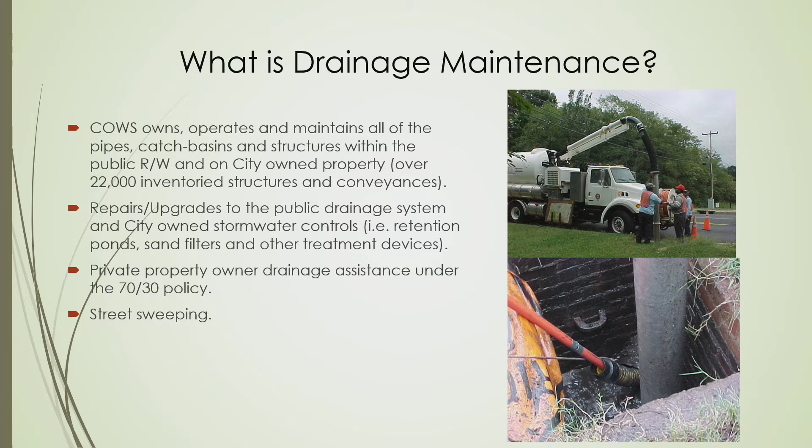Other programs that we have are our 70/30 private property drainage assistance policy, and then street sweeping that's taken care of by our sanitation department.

In recent years, we've seen a lot of uptick in these high intensity storms that has caused flooding and erosion across our community. These drainage systems, installed decades ago in the 40s, 50s, and 60s, have now exceeded their hydraulic lifetime. You're seeing things like large holes in our streets, caved-in shoulders, and thoroughfares that are not passable because the drainage systems underneath them have deteriorated to the point where they're collapsing.

At this point we have over 30 major repair projects across the city, and new projects are added regularly. As a matter of fact, since I did this presentation, we have new projects. So it's constantly evolving, constantly changing.

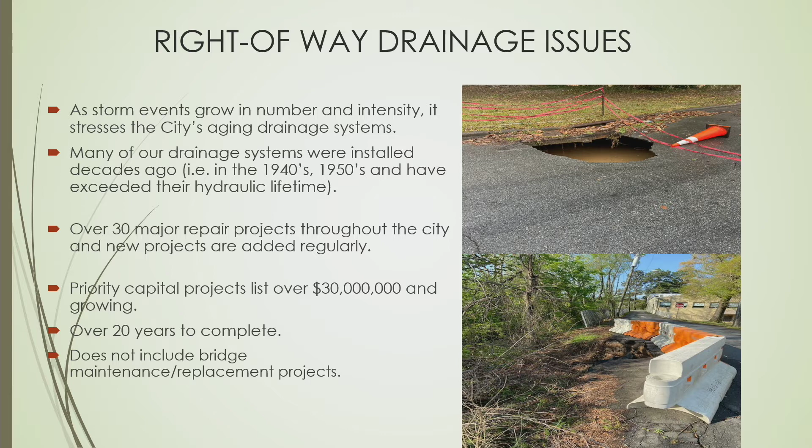That capital projects list is now eclipsing $30 million and growing, with a 20-year time span for completion. To note, this does not include bridges—this is pipes, culverts, and infrastructure pieces of a drainage nature.

Staff respond to, on average, over 500 calls per year, and they can vary from the occasional blocked catch basin that you send a vac truck out to deal with in a couple minutes, to a multi-block drainage failure—so they cross the spectrum. Our smaller repairs are taken care of by our in-house crews, but for these larger projects, we need help from contracted engineers and construction companies.

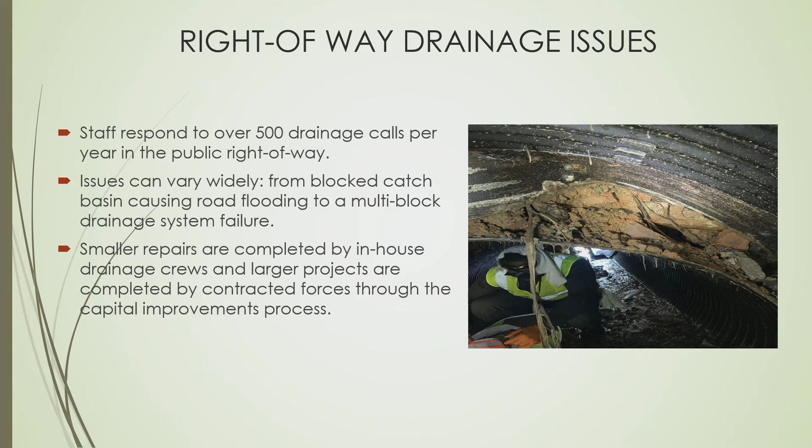So a little bit about the capital project time frame. A lot of our citizens like a quick turnaround on these projects and think the city should be able to move quickly, so I want to give some perspective here on the capital project timeline.

This all starts with selecting a consultant, an engineer, to help us out with design. That RFQ, or request for qualification statements, could last from 3 to 6 months to get to a point where you've selected a consultant. After that, you're negotiating scope and fee with that selected consultant, then proceeding toward project execution or contract execution.

At that juncture we've got a consultant on board, then we move forward with design, permitting, and land acquisition. Depending on the size and complexity of the project, that could take 6 to 12 months. Then you move to construction bidding once you've got the design, permitting, and bid documents in place—another 3 months there.

And then it culminates in construction, which could last anywhere from 3 to 12 months depending on the size of the project. So all this totals to a fairly large amount of time from the citizen's perspective as it goes from paper to actually having boots on the ground doing the work—just to add some perspective on what these capital projects take to get into the ground.

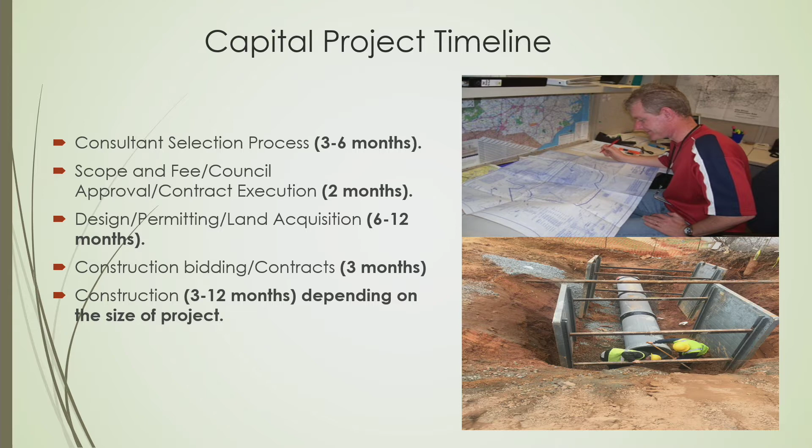Moving on to some of our higher priority drainage projects. The first one is Hawthorne Road, located in the southwest ward, probably about 150 feet south of the intersection of Hawthorne and First Street, Sinsenberger, that area.

This is the old Hawthorne culvert from before the highway was put in place, a 20 by 20 box culvert that is now settling. In the photos, the top picture shows the southwest corner, where the culvert, as it shifts and moves, is creating a sinkhole in the sidewalk. Just below it is the water line encased in ductile iron, and you can see how that infrastructure is pinching as the culvert moves.

So obviously we have to replace it. Estimated replacement cost is $3 million. As far as progress, we have an emergency contract in place with an engineering firm, and we are going through alternatives analysis on how to replace this culvert while keeping at least one travel lane of the road open because of its proximity to Baptist Hospital. But at the end of the day, the full culvert will be replaced.

Councilmember: Am I seeing that lower picture correctly? Is the pipe separating? Yes, ma'am, you are seeing that correctly. That is a water line where the bell and spigot of that ductile pipe has basically started to pinch. That's a piece of infrastructure we'll need to address when we replace the culvert. Unfortunately, this area is riddled with infrastructure, so it's far from a straight line - a very challenging project here.

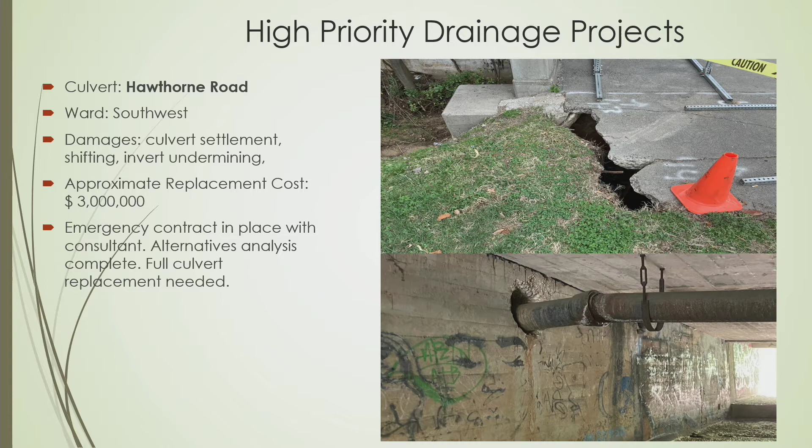Next, moving forward, this is Devonshire Road, off of Thomasville Road in the southeast ward. Here you have an aged 48-inch corrugated metal pipe where the bottom's rusted out - you'll see this theme repeatedly as we go forward. Metal pipes, as they age, corrode and rust out, so this is a full replacement of that 48-inch system. Estimated replacement cost is $350,000.

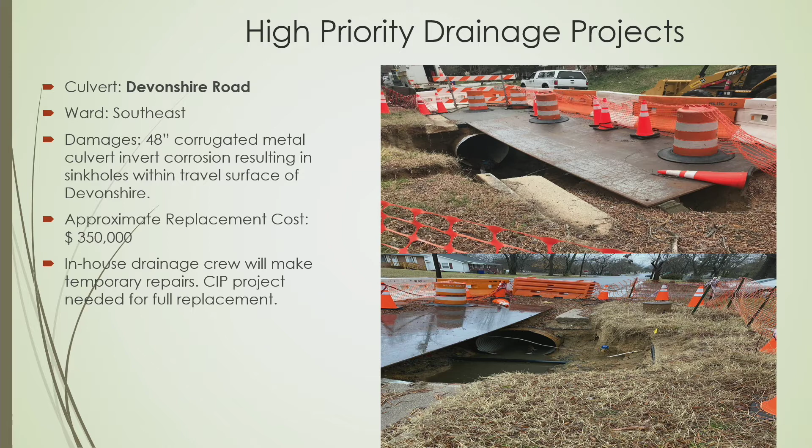Right now we've had in-house crews make a temporary repair to get the road open, and this will ultimately be designed and then bid out with a contracted external force.

Next is Lynnhaven Road, in the West Ward. Again, a corrugated metal pipe, failed system where the invert's rusted out. This is about 470 feet of metal pipe in the middle of the road, and it crosses all the water lines and sewer lines in the neighborhood. We've CCTV'd the pipe, determined the need for full replacement, and this will be designed and replaced by external forces as well.

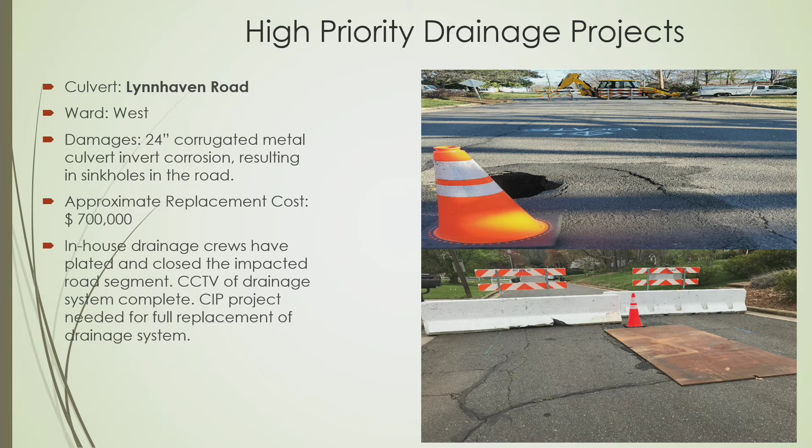Autumn Mist is in the Hillcrest Town Center development in the southwest ward. This is a damaged concrete pipe and a junction box that has basically resulted in a sinkhole in the road. Smaller project here.

We've CCTV'd this line and had our drainage forces out here as of late. We've discovered the issue, replaced a segment of pipe, and repaired the box, and we are currently backfilling this. So this is one I'm happy to say we'll be able to handle with in-house forces, and will probably need no exterior help from consultants or contractors.

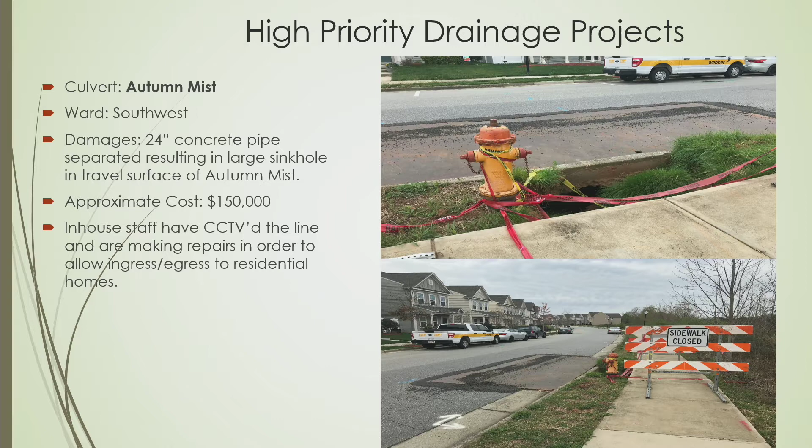Maplewood, basically another metal pipe in the southwest ward, off of Knollwood Street. This is two 54-inch metal pipes that corroded, caved in, and need full replacement. Approximate replacement cost is $700,000. We have an emergency contract in place with Louder, have delivered them a design, and have a contract with Louder to mobilize once they get all the materials in place, expected in June. So hopefully we'll get this open to traffic late summer, early fall of this year.

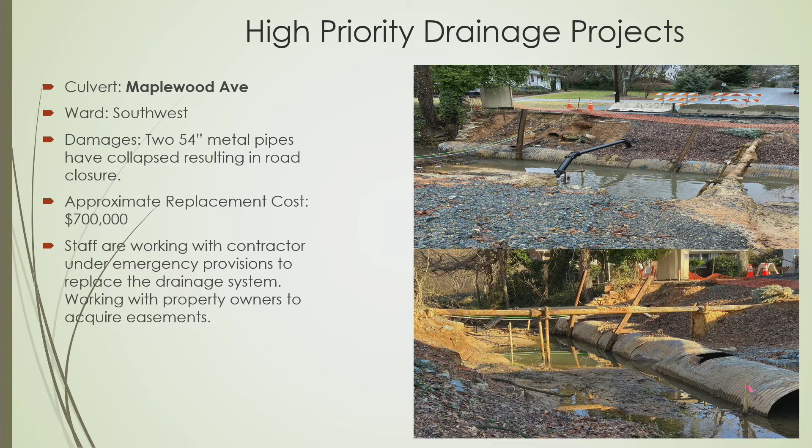Aubry Court, Northwest Ward, off of Yadkinville. This is a road that separates two impoundments where the 24-inch pipe system had decayed, failed, and took the head wall with it. The work here is to replace the pipes and the head wall. Estimated cost is $300,000, and in-house crews are working to replace the pipe and we're going to try to do the head wall work as well.

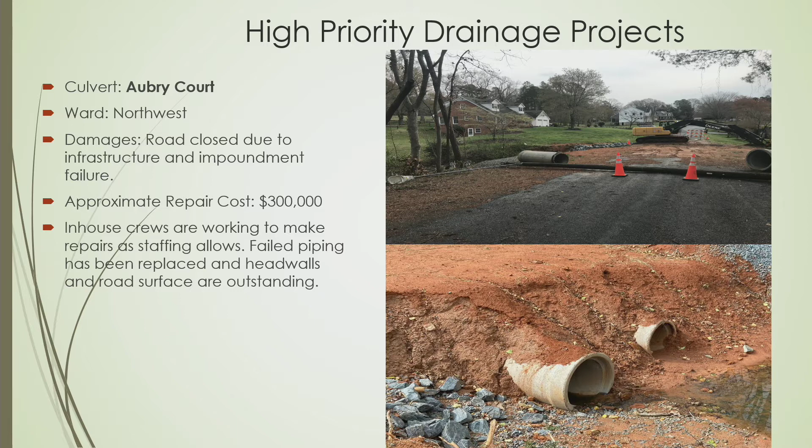Patterson Avenue, this has been on the books for a while, Northeast Ward. This is a failure of a 72-inch corrugated metal pipe. We are under emergency contract for that. Estimated repair cost is $1.5 million, and we have a contractor on board.

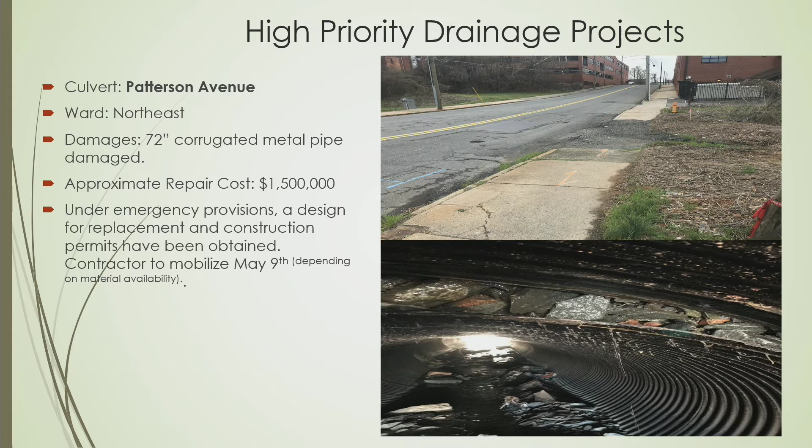This is one where material, or lack thereof, is costing us time. Our supplier cannot get the steel to create the reinforced concrete culverts we need to put in the road. So we're in a hurry-up-and-wait mode, waiting for the steel to create the pipe so we can put it in the ground. It's a situation numerous contractors and we, the city, are feeling with material shortages.

Why does that one cost so much more money? Councilmember, Scipio, this one is very deep and very complex.

This one is just up from the Beatty Center, and it has a lot of infrastructure rolling over the top of it. It's got fiber, gas, every utility you can think of overriding this metal culvert. It's also a 6-foot pipe, a very large diameter pipe, large trench, and it's got to have new head walls, the concrete on the upstream and downstream side.

You say it's up from... it's just north of the Beatty Center area. So it's going towards Liberty Street? It's at the intersection of Patterson and Northwest. Oh, so it's down, okay. Yeah, north, as far as directional. Apologize for that. Thank you.

So Underwood, north area, again a large-scale concrete box culvert. It's failing, but this one is actually not a full replacement. This is a retrofit where we're working with a structural engineer to pour a new invert in the bottom of the culvert and repair the walls instead of totally replacing it. That's why you see the reduced cost on this one at $500,000. We have a contract with a consultant to do this work and are proceeding through design as we speak.

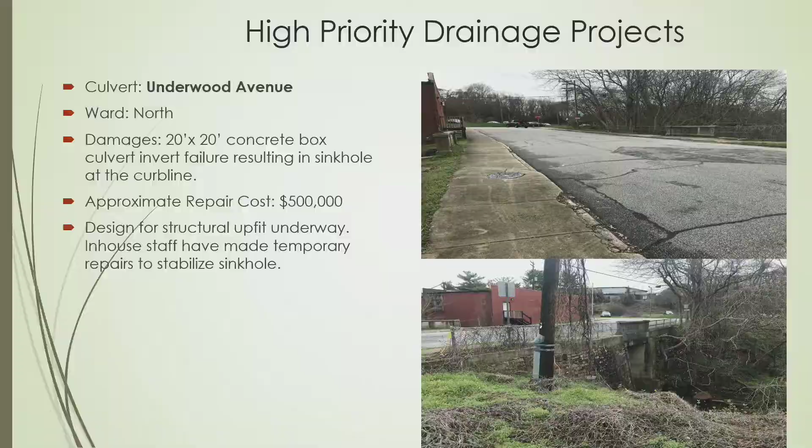I know I quickly went through those in the interest of time, but happy to entertain any questions. Mr. Huff, thank you for your typical good work and very illustrative presentation. Do we have questions? Yes, Councilmember Scipio.

I always love these information sessions because it gives me insight into what really goes on in the city that we don't always think about. Public Works Committee, keeping it real. It's really wonderful.

I have several questions. First, how large is your staff that does all of these in-house repairs? It used to be a whole lot larger. Councilmember Scipio, right now we have one in-house drainage crew that consists of a foreman, a heavy equipment operator, 3 mediums, and 3 lights. It used to be 3 in-house drainage crews, but due to staff attrition, we're running with only 1 drainage crew right now.

Are the 2 crews that we don't have in our current budget to be filled? Oh yeah, they're just vacant positions that we're trying to fill and trying to encourage anybody to come work with us.

The other question is, this may sound crazy, but do we know where all of our pipes are and the materials they're made from, or do we discover it when something fails? We know where 22,000 of them are, but that's not all of them right now. We're constantly adding inventory. When we accept a new street over for city maintenance, we're adding those pipes and pieces of infrastructure into our inventory. But that's only within the public right-of-way. Anything on the private side, we don't know the answers to those questions because we don't own, operate, and maintain it.

So yes, this is an information item, a continuation of the committee's updates on the Weaver fire. This happens to be an environmental perspective. There will be a lot of overview for this group on this one as well, based on your exposure to the Weaver fire. But on this one, we're going to focus on the impacts to air quality, the impacts to water quality, and then from an environmental standpoint, give the committee a briefing on what's going on currently with the satellite facility on Brownsboro Road, and then the parent site at Cherry Street.

So just a little brief overview or repeat of the timeline. Our first call came Monday evening, January 31st, in the 6:45, 7 o'clock range, reporting of the fire. Then as we progressed to 9 p.m., we started talking about evacuation of the 6,500 residents in the area of the Weaver site. That following morning, an 8-member EPA emergency response team came to Winston-Salem and immediately started setting up air and water monitoring locations to start collecting data. The local, state, and county regulatory groups started meeting to coordinate with EPA, share resources, and start getting boots on the ground to the stream sites and air quality monitoring sites, as fire suppression activities continued through February 2nd. And the Forsyth County Office of Environmental Assistance and Protection sent out daily media releases on air, exercising precautionary measures, et cetera, as we went through those initial days after the fire started.

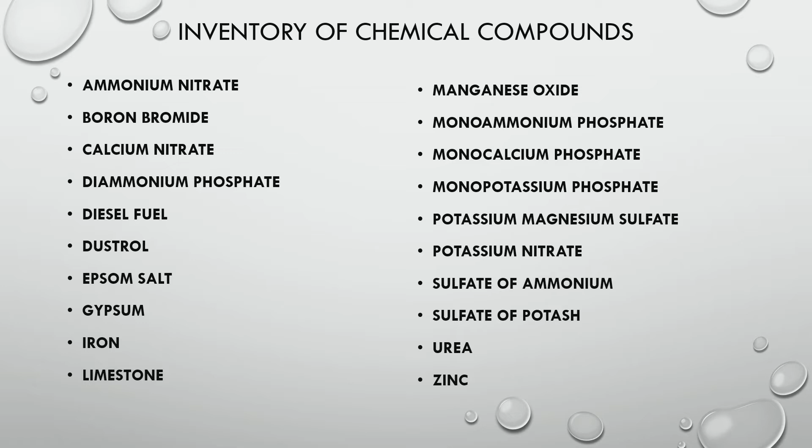So just a quick recap of that. As we all know, the Weaver site had a healthy list of fertilizers -- large quantities of fertilizers and fertilizer-related products for their production area. And we knew that they were capping for the spring season, so they were at their max. You've all seen these lists of fertilizer components before, starting with the ammonium nitrate and going all the way down to the urea and zinc that they use to mix all the fertilizer batches.

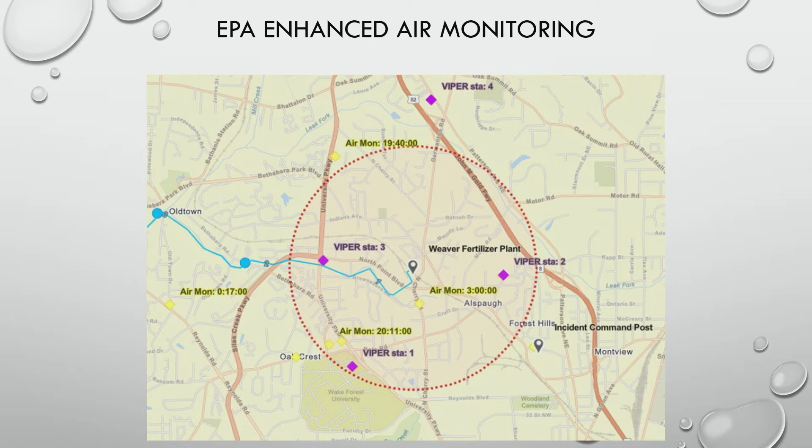So when the fire started, there were some existing sites from an air quality perspective that Forsyth County had set up. You can see the yellow diamonds and the magenta diamonds. Basically, EPA and the county supplemented sites to get a more robust network of air monitoring around the Weaver plant site so they could start obtaining data. So this is an EPA threshold level for particulate matter -- basically their measure of how healthy the air is. It's measured in micrograms per meter cubed. I want to draw your attention to the bottom line, the hazardous section, where basically in an 8-hour average, anything over 300 micrograms per meter cubed is considered hazardous. So that 300 level there, we'll use as our benchmark or reference point for hazardous.

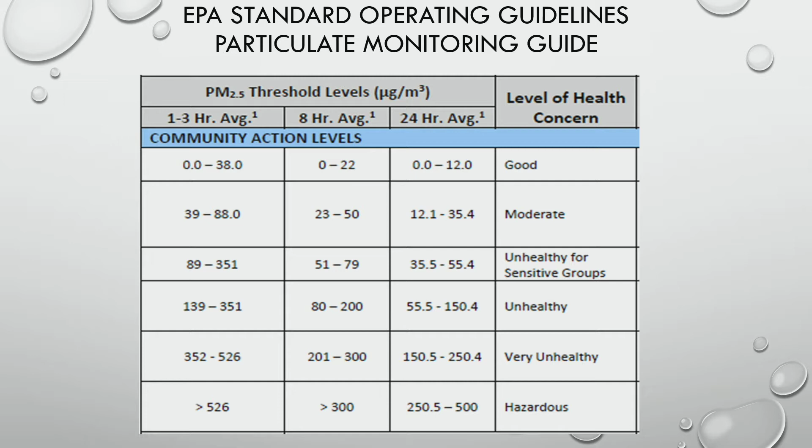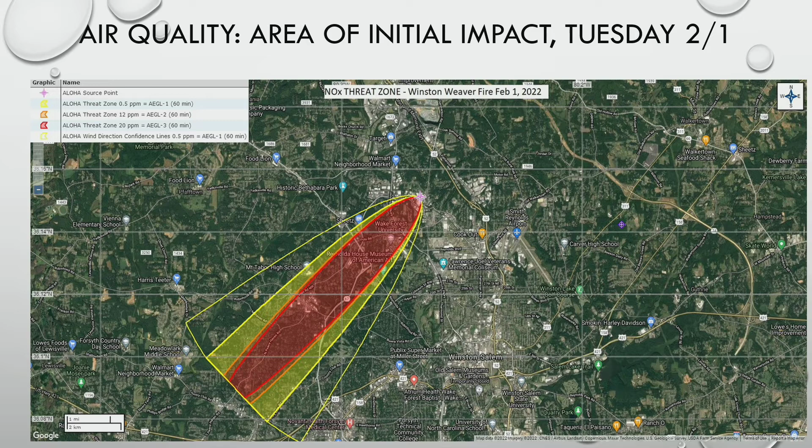So this is from Forsyth County. This is their cone of influence as far as what is hazardous and what is not. That cone of influence extends almost down to Country Club Road the first 24 hours and change after the fire. And because we had the wind prevailing in that direction, that's where the bulk of the pollutants and the hazardous conditions maintained itself.

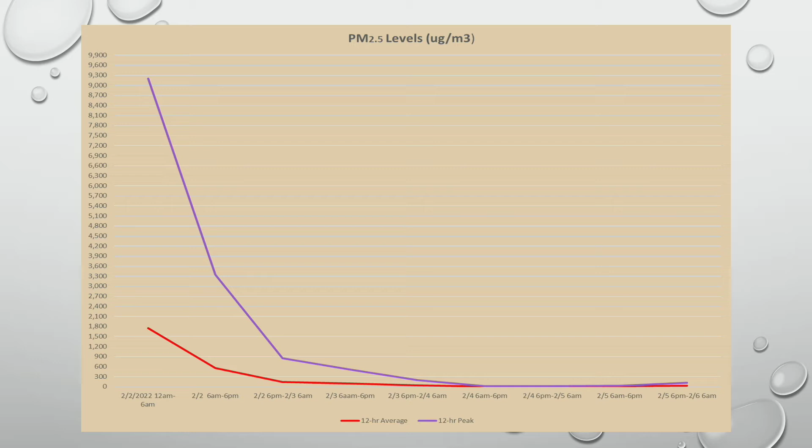So going back to that 300 micrograms per meter cubed, when they first started testing, they had peak 12-hour levels in the 9,300 range and averages in the 1,800 range. So we are well above hazardous conditions for air quality until we extend into the Wednesday evening to Thursday timeframe with the fire. Once it was contained and all the hot spots were suppressed, you can see that trend line basically decreased rapidly. Once we get toward Friday and the weekend, we return to fairly reasonable air quality standards.

So we'll characterize it here. Basically, Monday night through Wednesday evening, we had hazardous conditions as far as air quality in that cone of influence. From Wednesday morning through Friday, it improved to unhealthy. And then as we got to Friday morning into the weekend, we returned to good. So initially, very bad air quality, but it was very short-lived in the scheme of things.

So moving on to water quality. Over the course of the fire, basically 4.2 million gallons of fire suppression water was used to extinguish the fire and the hot spots that ensued afterward. In that fire suppression water, you had nitrogen, phosphorus, that lovely, healthy mix of chemicals that we saw at the initial slide go into our creeks.

The main creek that it went into was Monarcus Creek. That basically goes down Brownsboro Road, crosses Bethabara, goes through Loman's Plaza, on out to Muddy Creek where it exits our city. So with the influx of chemicals here, we did have a substantial fish kill in Monarcus and Mill Creeks. As a result, state, local, and county all started sampling the creeks to determine the impacts.

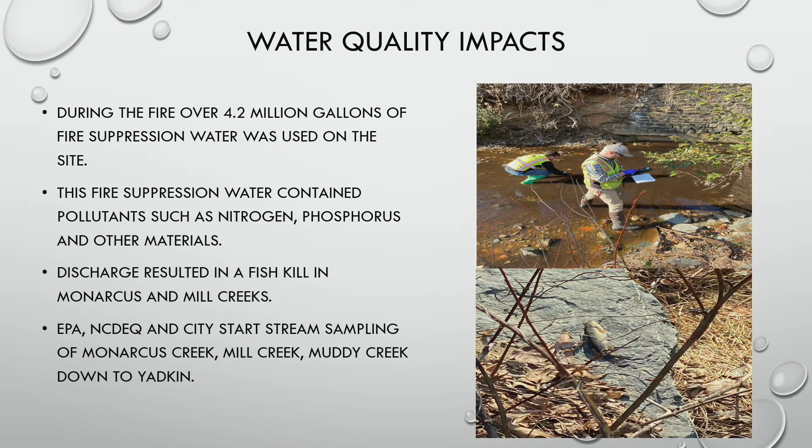This is a slide of the parent site as the star, and the various blue dots are sampling points as we go down Monarcus Creek toward Mill Creek and then out of town. Similar to the air quality data, the water quality data was orders of magnitude higher than anything we've ever seen with any other spill in the city, like the Chatham Road fire, et cetera.

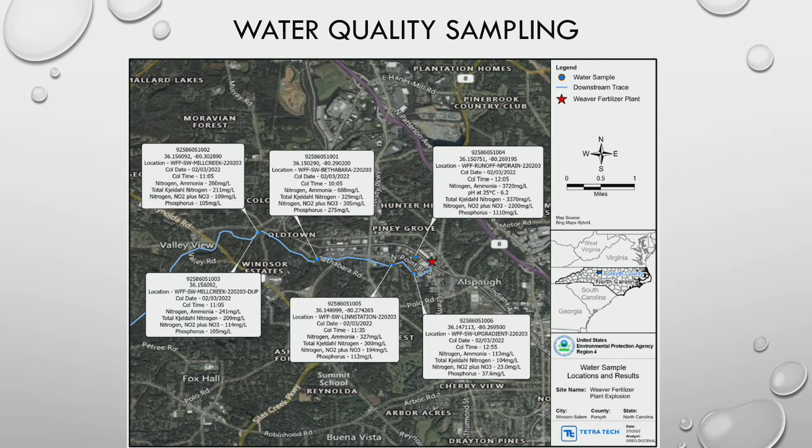You have ammonia nitrogen in the 3,720 milligrams per liter threshold. We have not seen that in any of our illicit discharges, fires, et cetera, in this city. And those concentrations remained elevated all the way down through Loman's Plaza in Mill Creek. Wow, so extremely high concentrations of nutrients in that runoff.

So the regulatory groups consulted with the state toxicologists. They looked at the data and determined that a water advisory was in order because of the levels of nutrients, because if you had a dog or a child playing in the water, it would obviously adversely affect them. So the regulatory groups took it upon themselves to post this advisory everywhere along Monarcus and Mill Creek where we had public access capability.

We posted signs in English and Spanish, and it stayed up approximately 2 weeks after the initial posting.

So on to the sites and what's kind of going on with them. This photo is of the Brownsboro Auxiliary Storage Site. They stored various types of raw materials there, talking about 50 to 75,000 cubic yards on occasion that could be stored at this site. We found this through our water quality sampling, where basically upstream of the discharge point of the parent site, we were getting high concentrations as well.

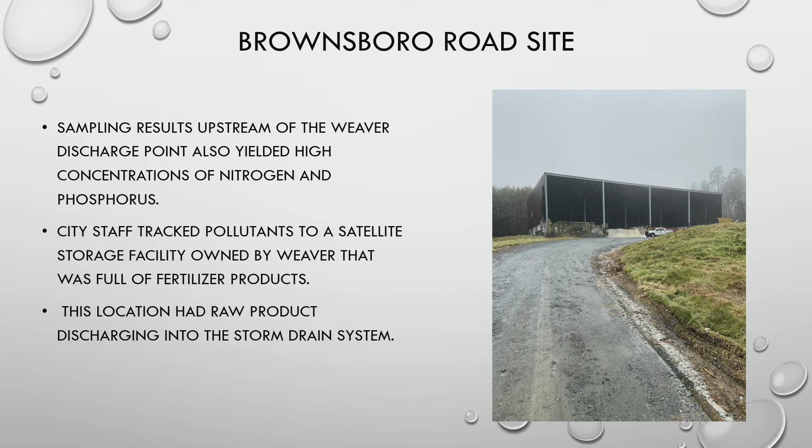So this led us to the Brownsboro site. We found that raw product was discharging into the storm drain system, and that ultimately led to the city levying a notice of violation to Winston Weaver Inc. On February 5th, we cited them, gave them a notice of violation, and required immediate corrective actions to address the fertilizer and raw products getting into our storm drain system.

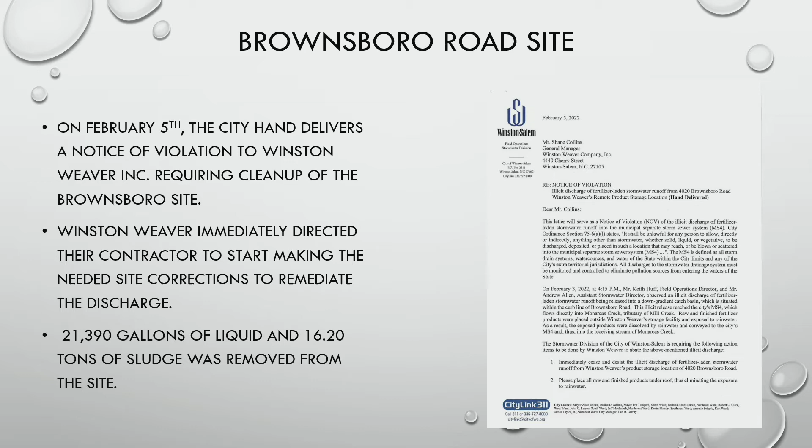To date, they've removed 21,390 gallons of liquid and 16.2 tons of sludge, which was just emulsified raw product from the site. So they've made considerable progress there.

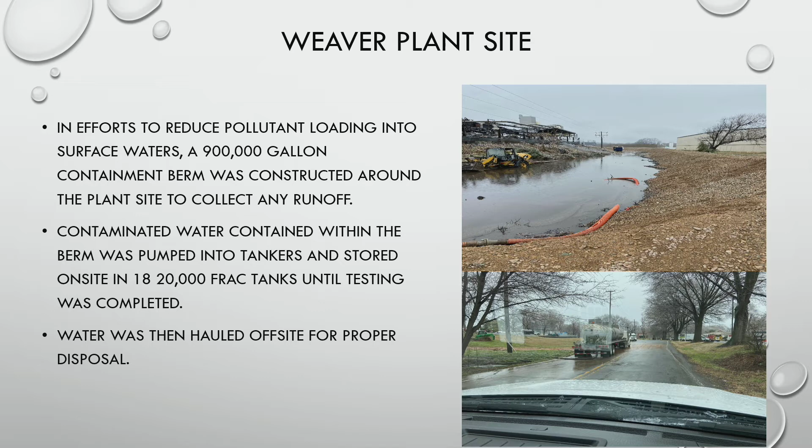Moving on to the Weaver site, basically to address runoff and continuous pollutant loading into our surface waters, they created a 900,000 gallon containment berm, and they pumped the contaminated water into what we call frac tanks. It's a big 20,000 gallon cell, which they're then testing and hauling off to local dairy farmers and fertilizer-needing entities that can take that water and land apply it. So that was the main thing the plant site was doing to mitigate the issues of consistent nutrient influx into our surface waters.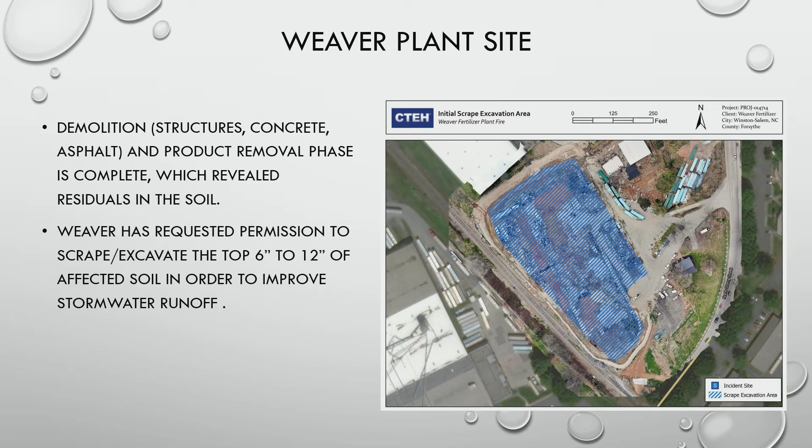Some ongoing things they're doing now that the plant is decommissioned and all the concrete's removed, they have bare soil. They've done some testing on the site that revealed residuals in the soil - some salts, metals and other hazardous materials that need to be addressed. So Weaver has requested permission to scrape the top 6 to 12 inches from the site. They've requested an erosion control or grading permit to do so, to have all of these residuals removed and disposed of properly so it won't continue to infiltrate into our surface waters after that berm is removed. So that's an ongoing activity they're undertaking.

So next steps, we're going to continue to monitor them. We're continuing to monitor the streams to make sure those pollutant loads are reducing over time and that the activities they're taking on the parent site are actually mitigating the damages and pollutants we're seeing. The state is involved from the inactive hazardous sites branch, where they're requiring water quality testing of the groundwater and soils on a regular basis - enhanced testing on their part. Those results will determine the next phase of where Weaver's directed. And they continue to haul these raw products, the frac tanks and the soil, off the site.

So we are far from the conclusion and closure of their site as it exists right now. Staff has asked them to advise us if they have any inclination to rebuild anything on that site, and we do not have an answer to that yet. So they have not gone on record officially yet on their intention for the parent site. That's kind of the state of the union on the environmental side.

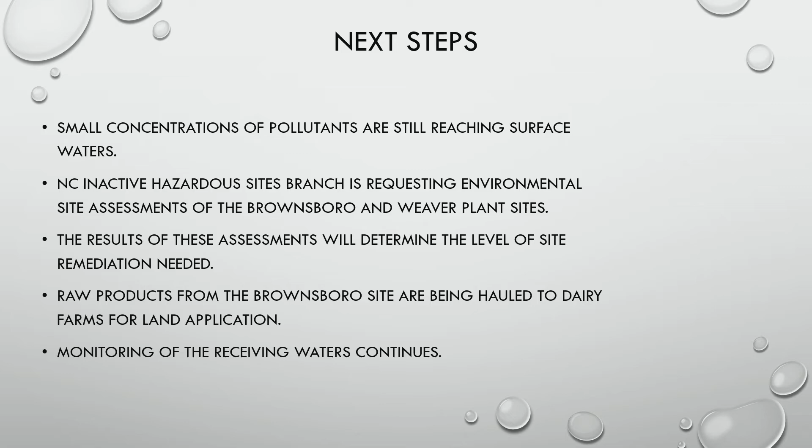So again, happy to answer any questions. Keith, thanks again for an excellent report. Have I got questions from council members? Councilmember Scippio.

When the creeks became polluted and they went to the Yadkin, did we monitor the Yadkin water? And I know that our water system, our drinking water, comes from the Yadkin. Were there any precautions or special treatment of water at our water plants that provide drinking water?

Excellent question. Our intake for our water supply is probably 12 miles upstream of where this pollutant load got into the Yadkin. Councilmember Scippio, to answer your question, the Yadkin was monitored, but once it got that low in the watershed out of our community in Davidson County, the concentrations were not as distinct as what we saw on Monarcas and Mill Creek. So it never posed a danger to our drinking water supply. And even as low as the Yadkin, where it discharged from Muddy Creek into the Yadkin, it wasn't a large contamination source as far as fish kill and so on. Was it something that we wanted? No, obviously not. But it wasn't at the level of danger that Monarcas and Mill was, as far as the concentrations in those streams.

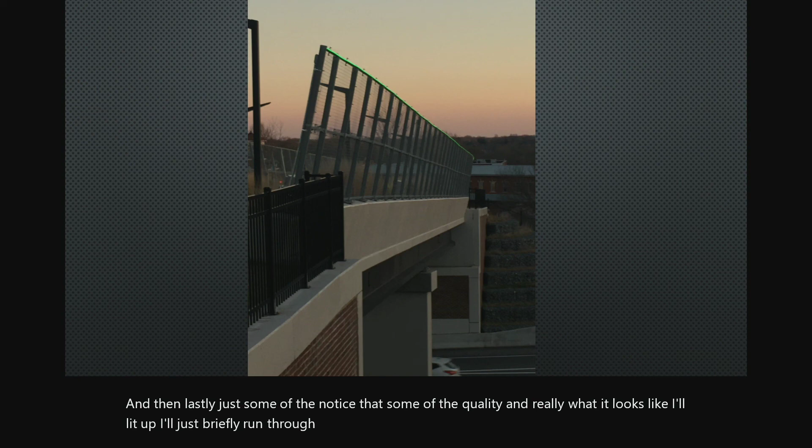And then lastly, just to notice some of the quality and really what it looks like all lit up. I'll briefly run through these. We're really proud of these architectural features and what we can implement there. Again, the arches over 52, we have both the pedestrian bridges, and it's just a really good amenity that Winston-Salem DOT does manage and handle.

So again, what this does is essentially establish a process that we can bring back on a yearly basis, which establishes a calendar of events and then provides the authority to dictate any overlapping events and reestablish that protocol. So I'm happy to take any questions.